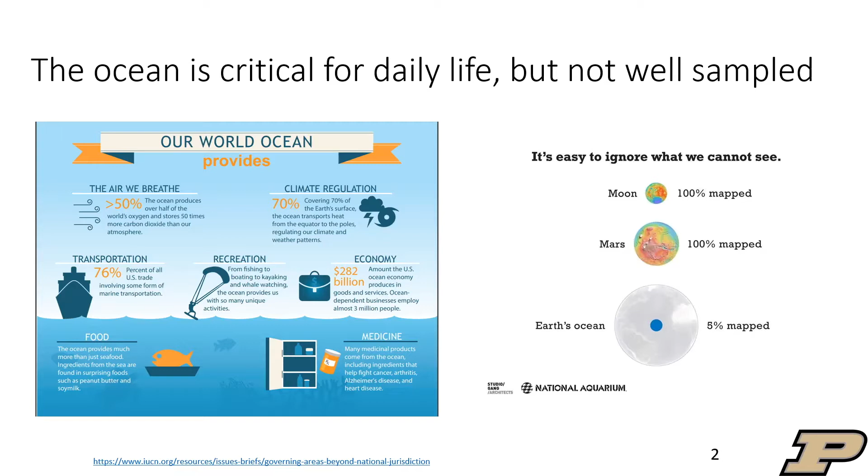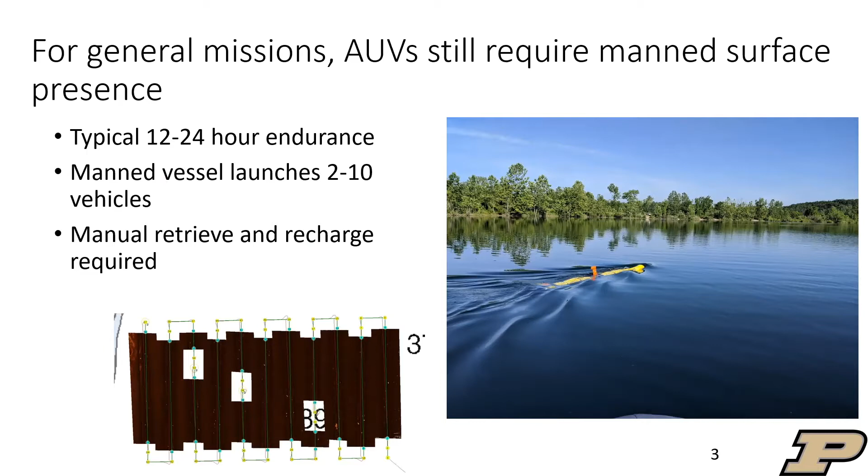Typical sensors have a range of a few hundred meters or a kilometer at maximum range, and basically it makes it so that we have to deploy a large number of vehicles to achieve any sort of goal. One way to do this is to utilize autonomous underwater vehicles with the support of manned surface vessels. Basically a manned surface vessel will go out in the ocean, deploy somewhere between 2 and 10 of these autonomous underwater vehicles. Those vehicles will operate for 12 to 24 hours doing a survey, and then be manually retrieved, recharged, and retasked. But still, you need to have that manned surface vessel, which costs in excess of $30,000 per day to actually operate. So any sort of large-scale operation is just basically infeasible.

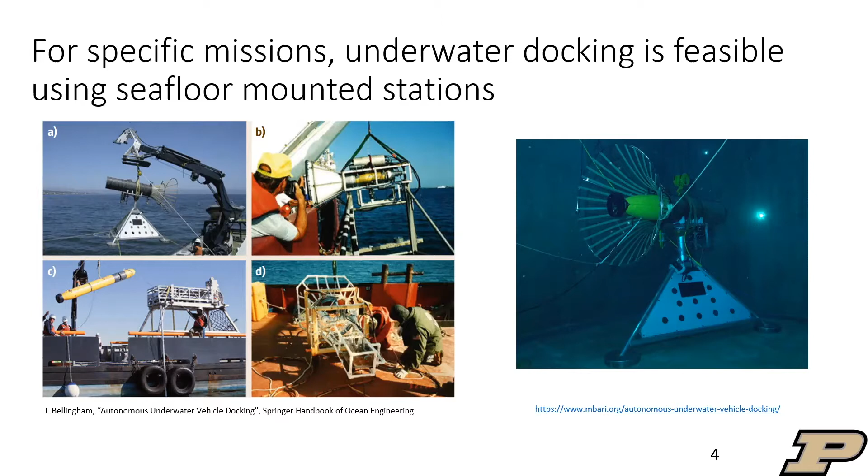For very specific missions, autonomous underwater docking is a feasible solution using current technology. These docking stations shown here are the most common type of docking station. It's basically a large funnel design, and with these docking stations, the vehicle comes in, bumps along, and is docked. Each of these stations is highly capable of supporting persistent operation, but they're each in excess of $1 million, are seafloor mounted, and only support a specific kind of vehicle. So that means that it would be equivalent to a gas station that doesn't support different makes and models of vehicles. Basically, it's an infeasible solution going forward.

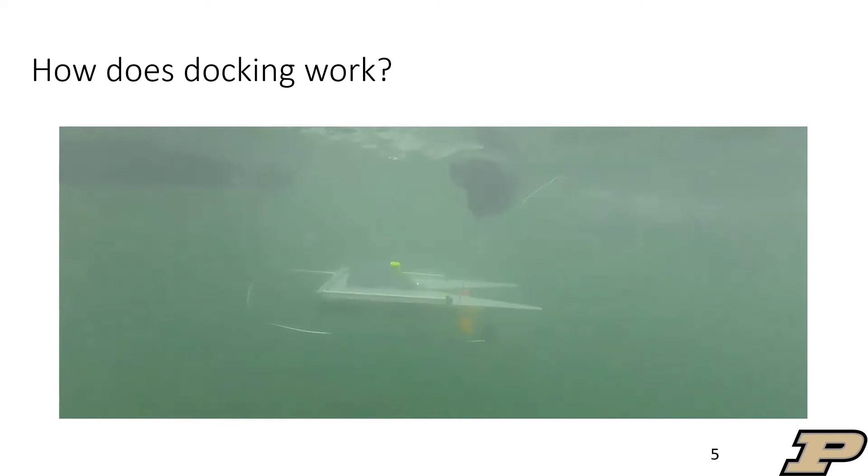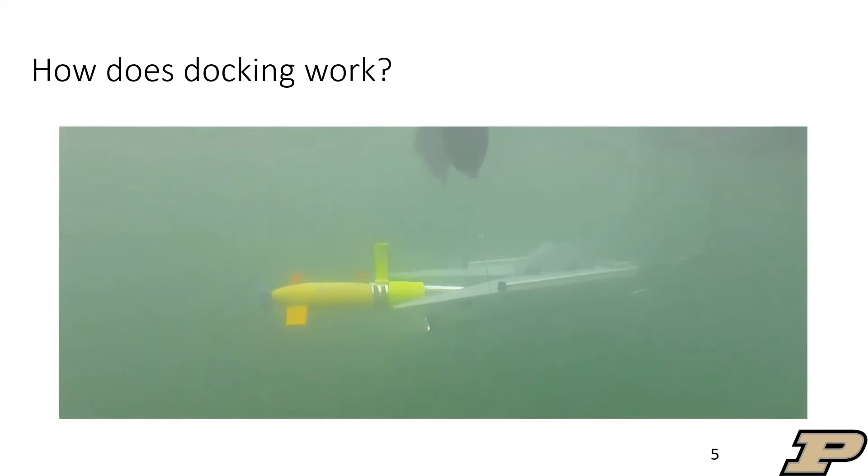And that led us to develop our own docking station, which is the Adaptable docking station. Basically, we realized that autonomous underwater vehicles are very good at controlling their depth, so we can simplify that design down, that 3D funnel design, into this more planar design, and then go in and dock to this docking station.

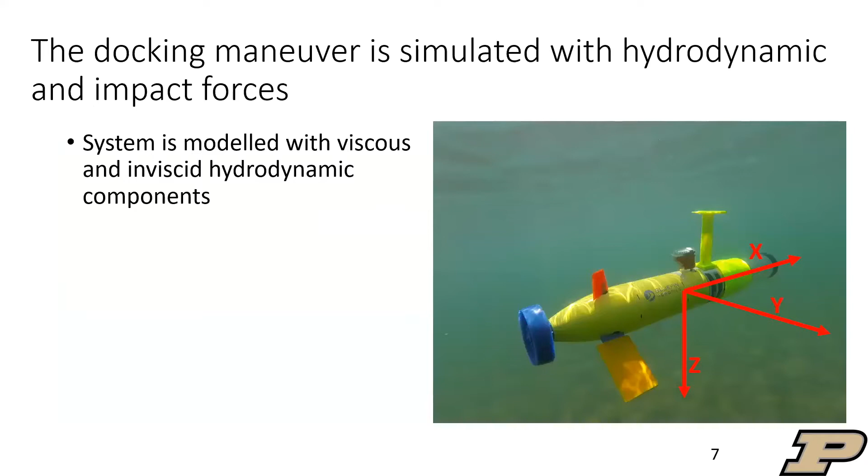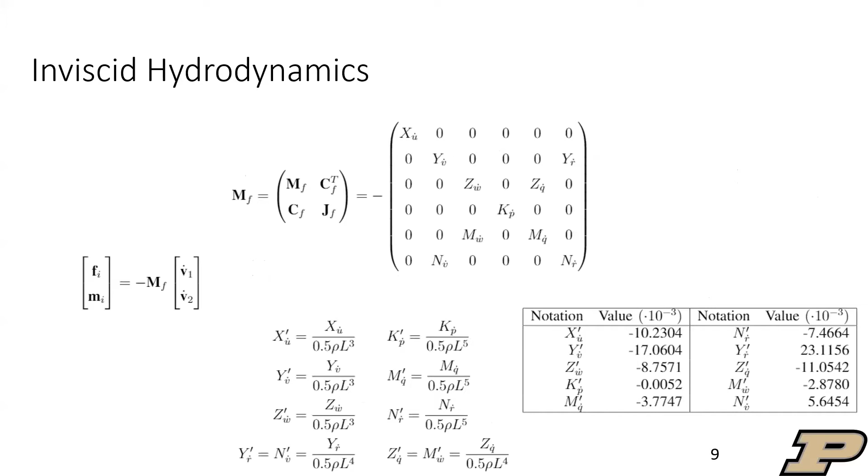But how did we actually get here? First, we had to model the system using hydrodynamic and impact forces. The hydrodynamic forces are modeled based on viscous hydrodynamics, which is basically terms based on velocities, angle of attack, that sort of thing, as well as the inviscid hydrodynamics, which are based on vehicle inertia, added mass, basically things that resist acceleration. Impact dynamics are modeled similarly using a third-party software.

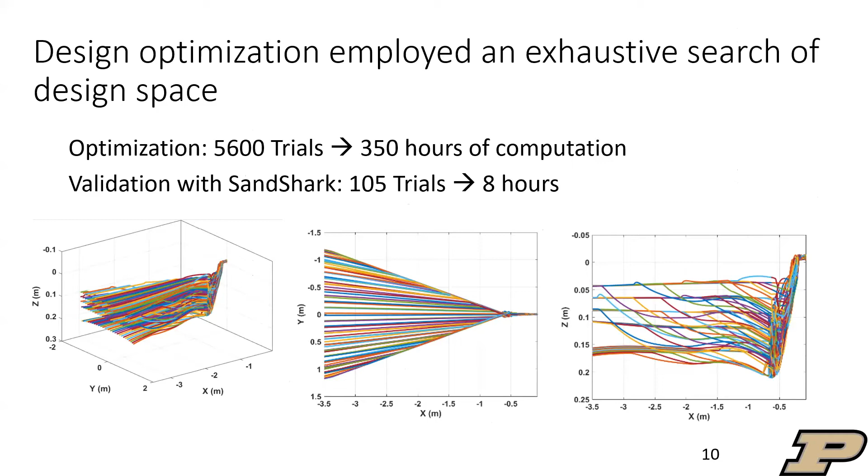Using these two terms, we can go and then do a design optimization to optimize the overall docking station design. That docking station design was optimized over several hundred hours of computation and validated with 2 different size platforms to basically lead to this result, where the vehicle comes in, bumps along the docking station, slides in, and is docked.

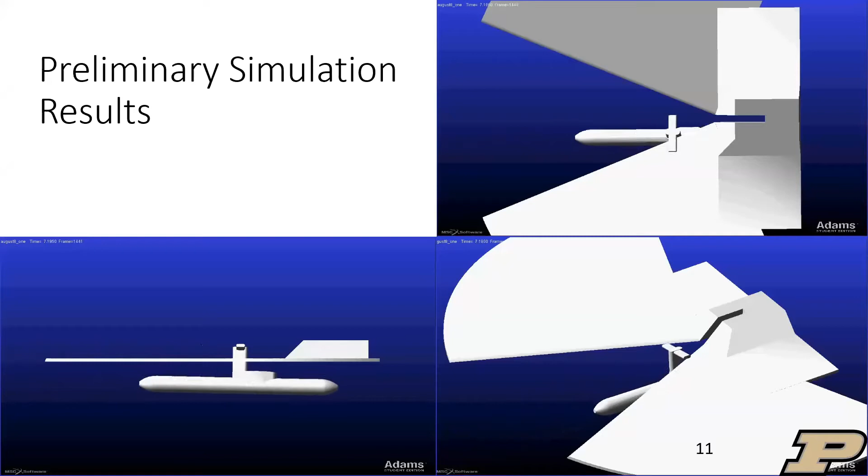As I said, we've validated it in simulation with a 10 kilogram size vehicle as well as an 80 kilogram size vehicle. These 2 vehicles represent the wide majority of actual autonomous underwater vehicles in the field.

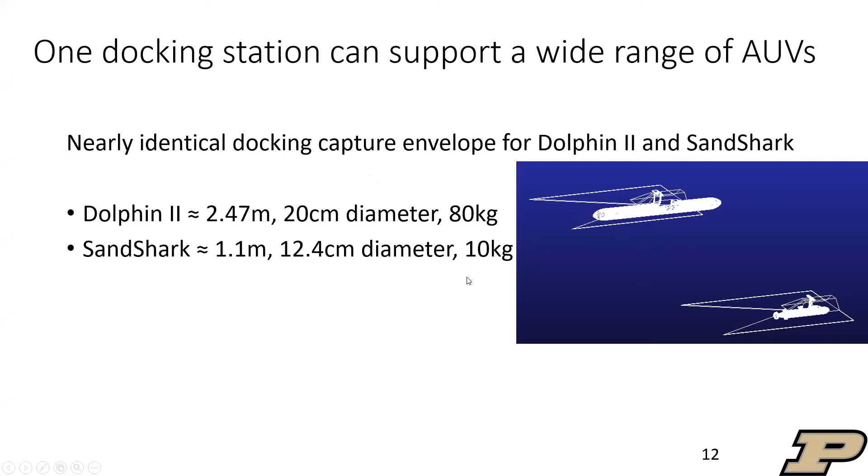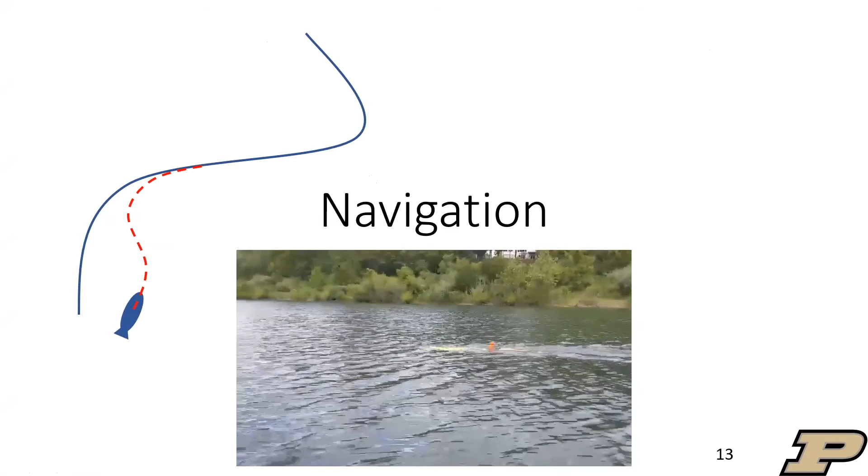So now that we know how the docking station is designed and modeled, we need to actually be able to implement it and navigate in the real world. Navigation in the real world for these vehicles is typically broken into 5 stages. There's the en route stage, which is basically the vehicle manufacturer controller doing basic scientific survey waypoint missions. At certain points through the mission, it will switch into what's referred to as backseat control, where we will take over with our custom controllers to approach or set up the approach and approach. By that, I mean that we will navigate from the field towards a point that is directly in front of and directly pointed at the docking station.

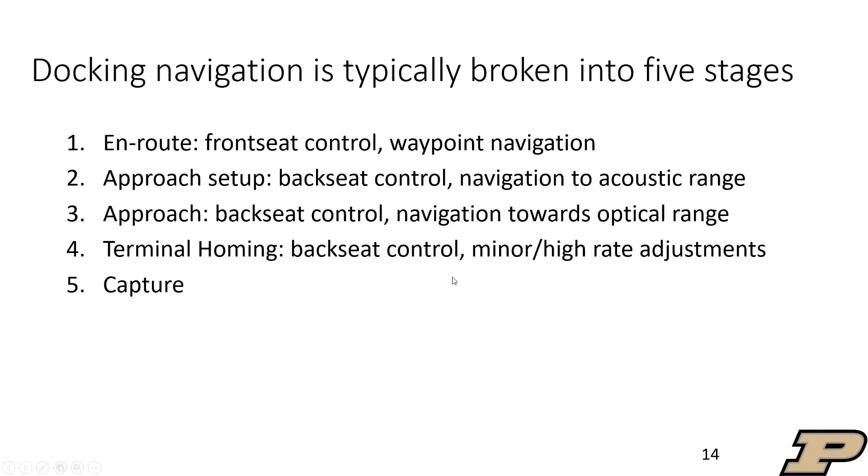At that point, it'll switch into terminal homing, which is based on optics for the minor high rate adjustments that are needed to increase our capture rate and lead to eventual docking. For our approach setup and approach phases, we're going to utilize a look ahead or line of sight controller, which is a very well understood common controller in maritime applications.

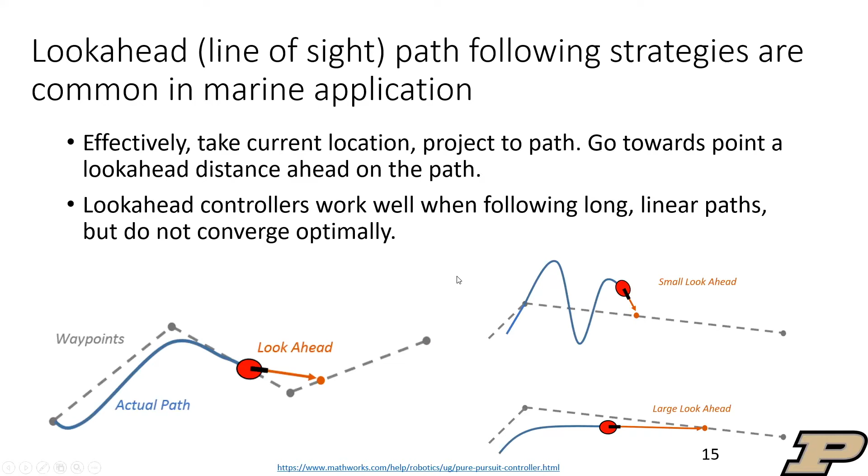One challenge of these controllers is that they have trouble with discontinuities, especially discontinuities in the location of the vehicle. Basically, they lead to instability of the controller. So we need to be able to handle those discontinuities, and we're going to do that by modifying the path that we're trying to return to, utilizing Dubin's set.

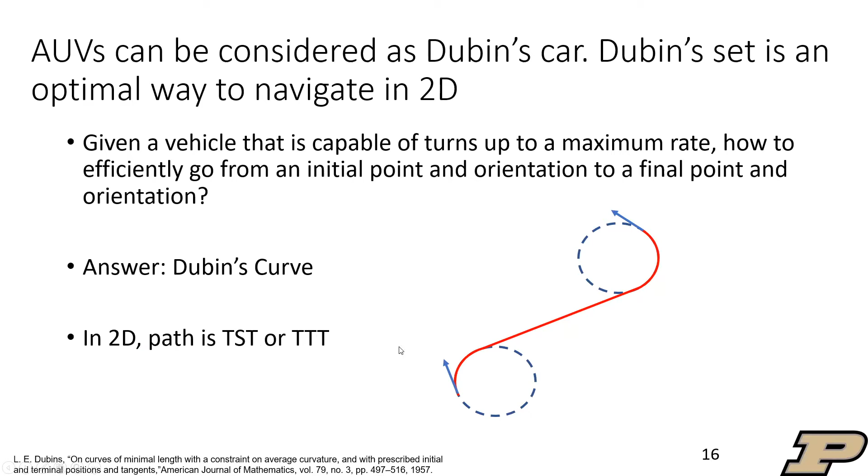In 2 dimensions, these autonomous underwater vehicles can be considered to be a Dubin's car, capable of turning up to a maximum rate. That means the solution to go from any point and orientation to any other point and orientation is always going to be this Dubin's curve, which is an easily calculable set of turn-straight-turns or turn-turn-turns to actually solve this path.

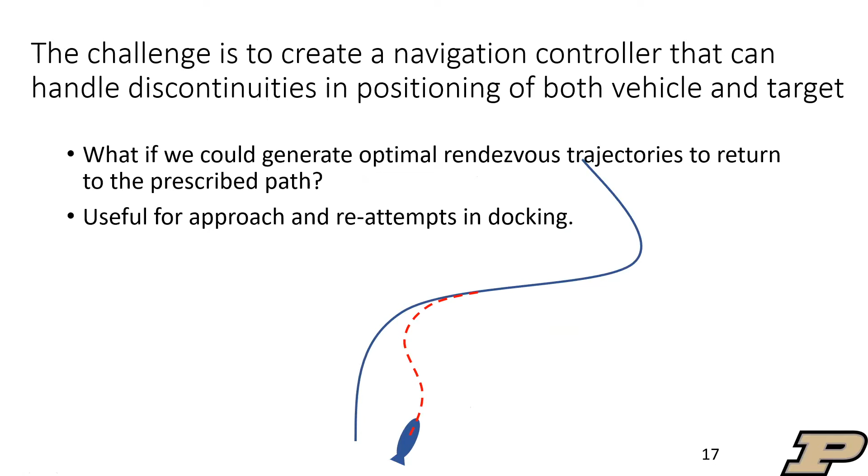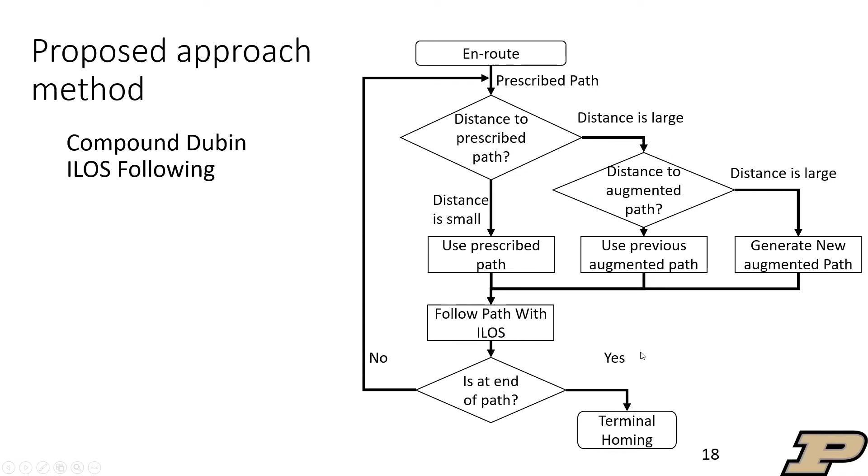Now that we know those 2 things, we can combine them into an overall navigation controller that can handle discontinuities for positioning of both the vehicle and the target, as well as handle reattempts on missed docking approaches. That leads to the overall approach method, where we switch into backseat control, measure our distance to the prescribed path. If that distance is large, then we measure our distance to the previously augmented path. Depending on the result, we generate a new augmented path, use the old path, or use the prescribed path, and then follow that path using integral line of sight until we reach the end of the path, at which point we switch into terminal homing.

For our terminal homing system, we're utilizing a very computationally efficient method. The reasoning for this is that autonomous underwater vehicles are very computationally constrained. Basically, they don't have power, they don't have the capability to do very intensive calculations. So we're doing optics based on a very simple brightest pixel approach. Find the brightest pixel, put it in the middle of the frame, use PID to control our rudder. Very simple, but very effective in the field and in changing water conditions.

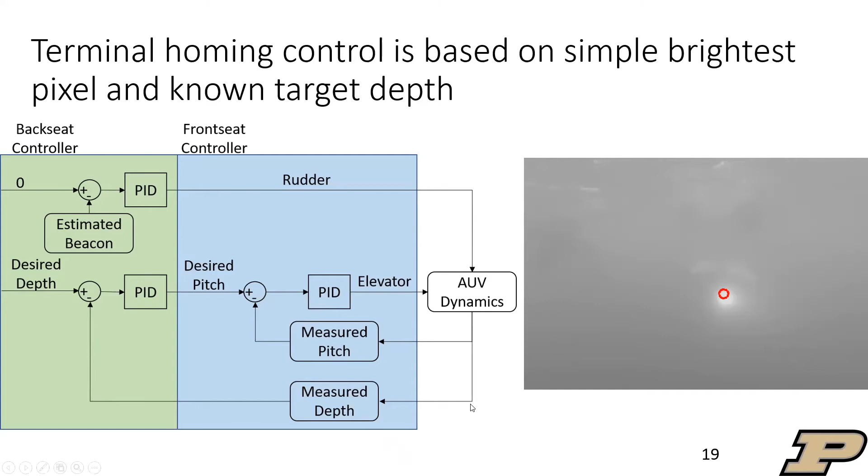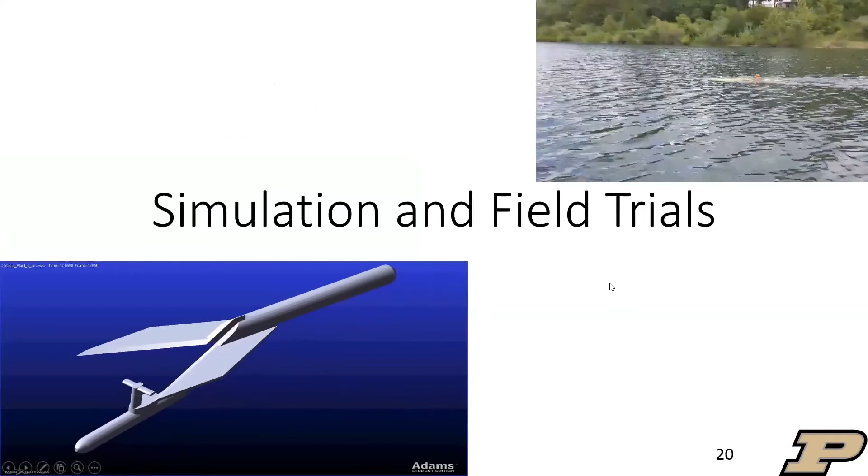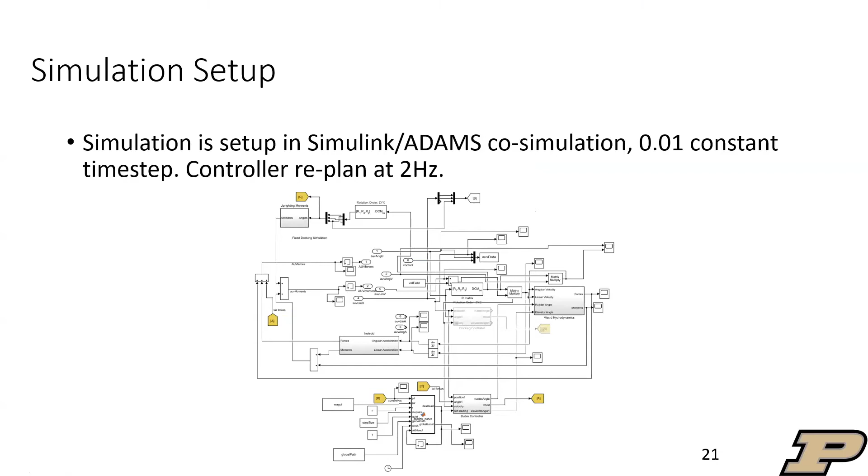Now that we know our approach, our control, and our actual design, we need to go and simulate and test in the field. This is where the bulk of the work has been, in the simulation and field results. For our simulation, it's set up at a 100 Hertz timescale, with the controller replanning at 2 Hertz. That's on the order of our controller frequency in the field trials.

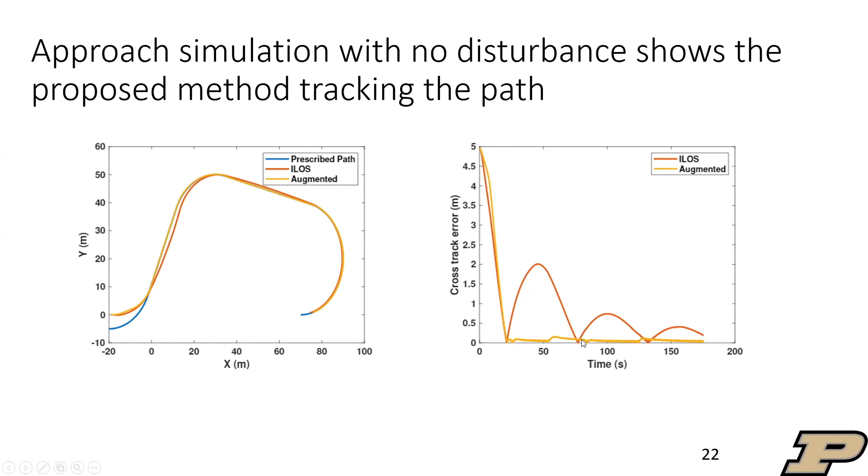These simulation results are going to be broken into 2 steps. The first step is this approach phase, where to validate the approach controller, I have it going around this blue path. The blue is the prescribed path that it's trying to follow, and then comparing the proposed method, which is this augmented method, with a more classical method, this integral line of sight method. The important thing is the chart on the right. You can see that both the proposed and the classical method converge at nominally the same rate. However, the proposed method is much better at rejecting these overshoots when there's no disturbance.

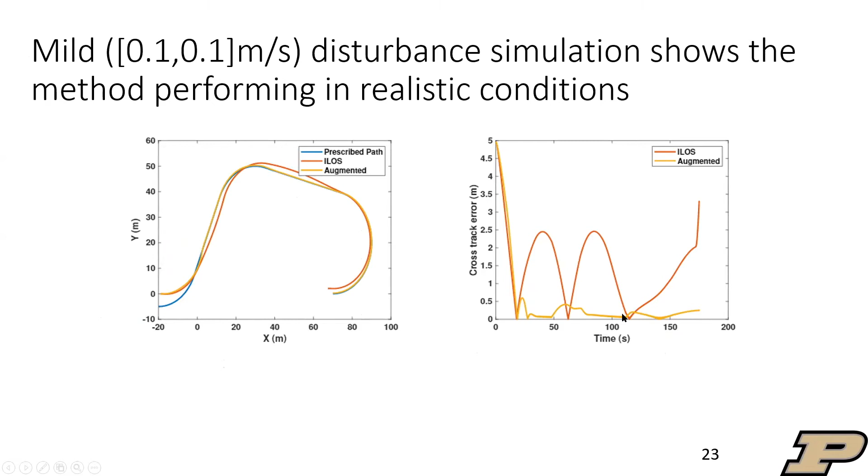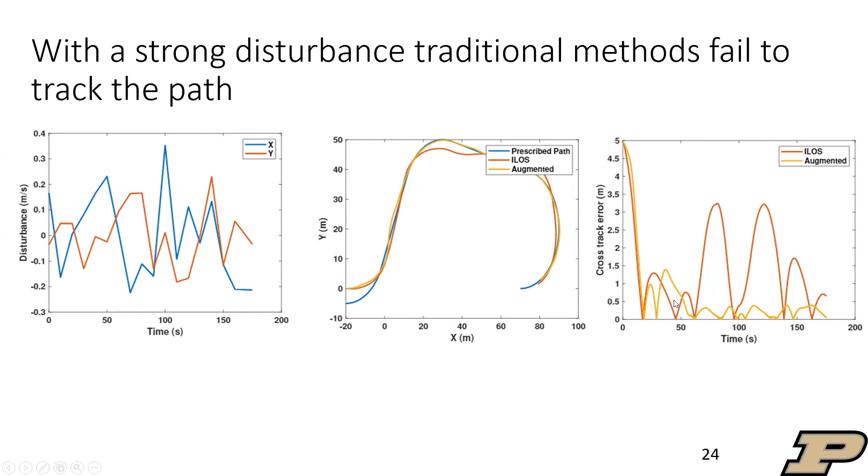When there is some disturbance introduced, a realistic disturbance of 0.1 meters per second in both directions, we have similar performance of the traditional method, where it has this overshoot pattern, while the proposed method is able to reject those disturbances. If we try to introduce a strong, not realistic disturbance, you can see that both controllers have more trouble with this disturbance. However, the proposed method is still able to maintain less than half a meter of cross-track error for the majority of operational time. The overall result is that the proposed method shows a 2 to 3 times improvement compared to the traditional method when considering the cross-track error over this trajectory.

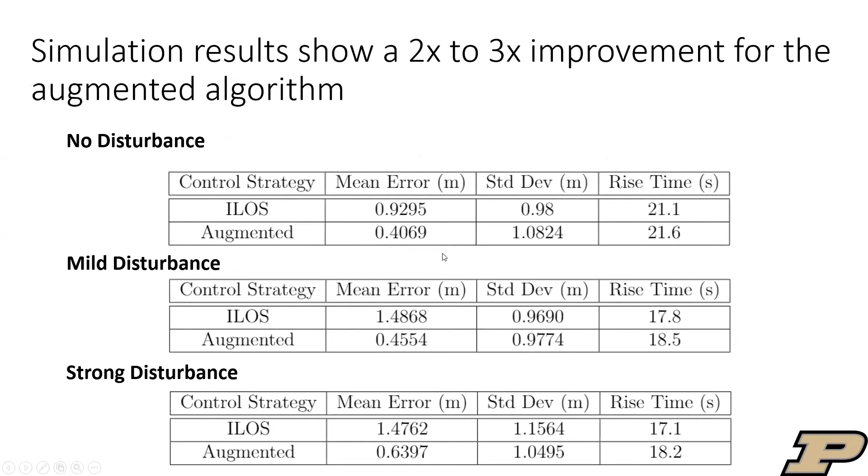That is important because it means we can always deliver the autonomous underwater vehicle to a handoff location for our terminal homing system. And for our terminal homing system, we're using this very simple approach. Here's the results in simulation.

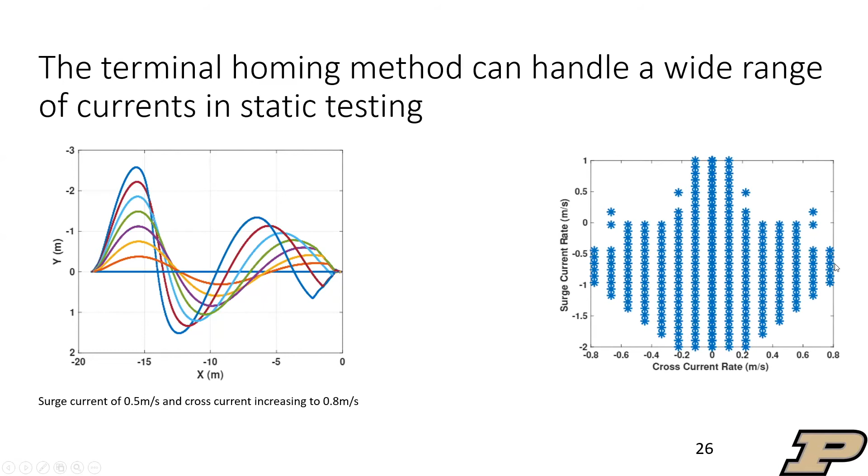That leads into our field results with this system. The field results I'm going to talk about in two stages: we have the approach phase and the terminal homing phase. They are disconnected at this point in the field, but are being worked on to integrate into one system currently.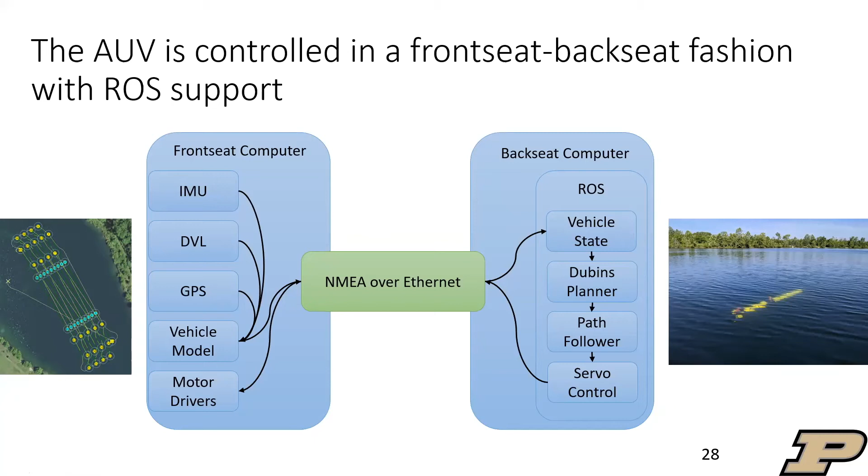With these two systems combined, we can achieve a wide range of things, such as extended autonomy testing, having it go around this pattern in the Fairfield Lakes Pond nearby. If we pull out a single trajectory, you can see we're submerged for the vast majority of the time, surfacing at relatively consistent intervals to get GPS localization. Over the trajectory, the majority of the time we're within 1 meter of cross-track error, which matches what was simulated.

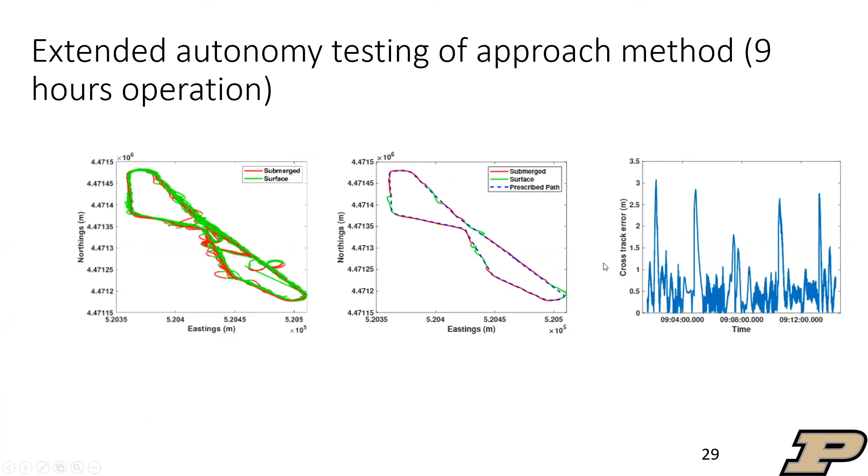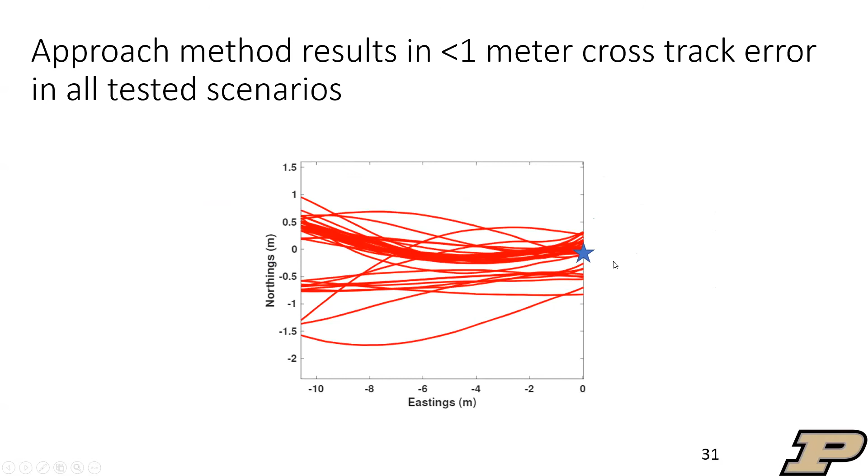If we consider the virtual handoff testing, basically how we approach this handoff point to switch into terminal homing, we can show that in every single tested scenario - this one went around the track 49 times - in all 49 scenarios it was less than 1 meter of cross-track error. That's significantly smaller than what was tested for our terminal homing system.

This implies that our overall experimental success, once these two systems are combined, will be very high, on the order of 70 to 80% success rate. But when you combine that with the reattempt ability of our planner, it will quickly drive the success rate to near 100% in the field.

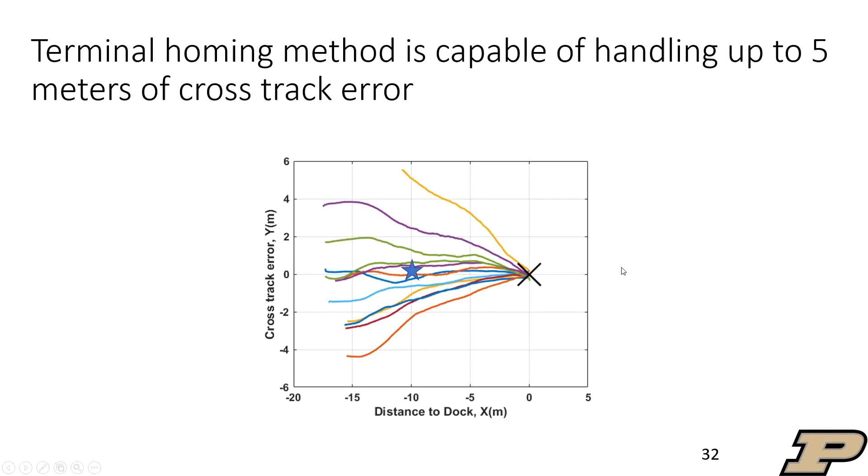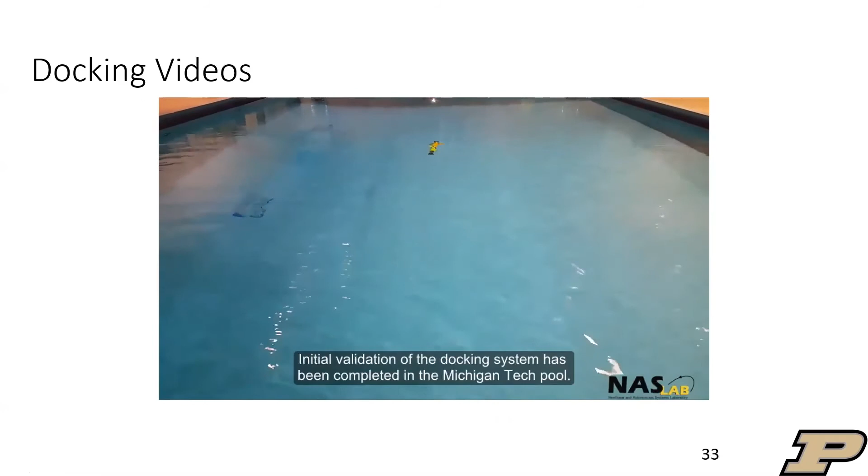That gets into the actual videos of our docking system. These are probably the best way to actually explain how everything works. You can see the vehicle is coming in here. In this case, we released it from relatively straight in front of the docking station.

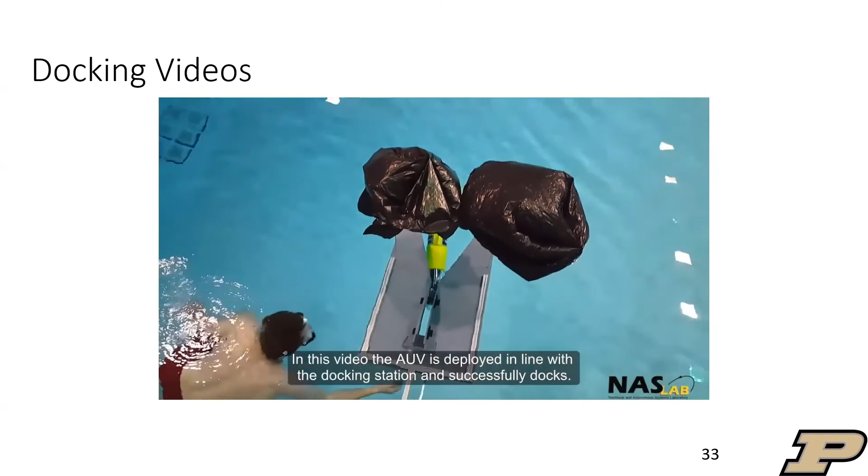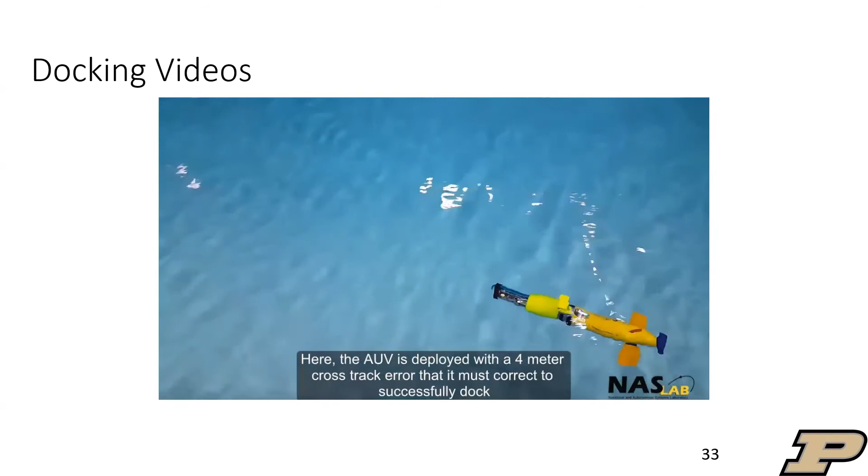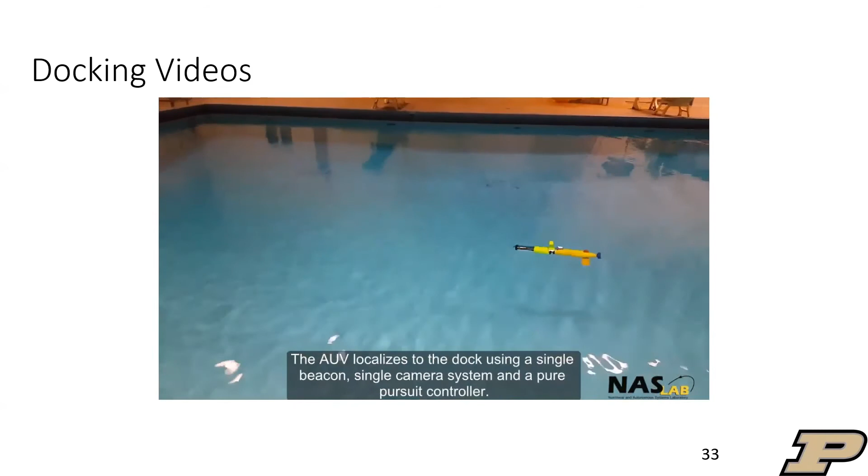So you can see it comes in, slides, and is docked. Once it's in the docking station, we're working on integrating the power electronics to actually recharge. But for now, it's just getting into the docking station. In this one, we're releasing with a 4 meter cross-track error, and the very simple single brightest pixel approach is quickly able to correct for that 4 meter cross-track error and navigate the vehicle into the docking station from across the pool and successfully dock.

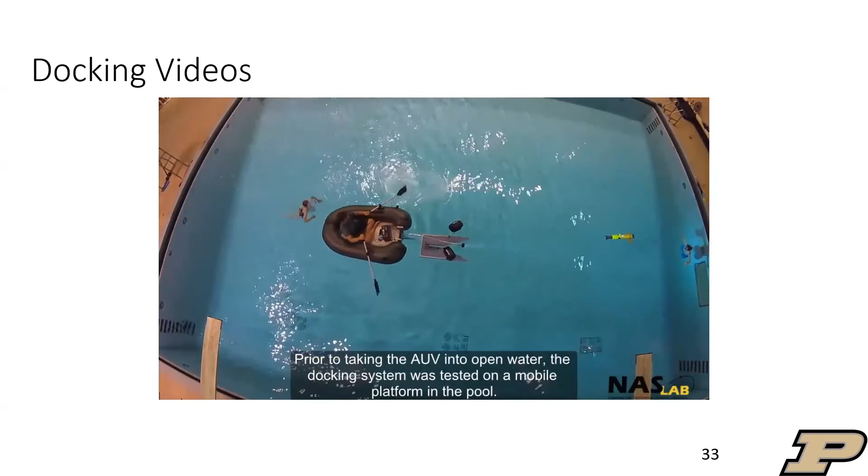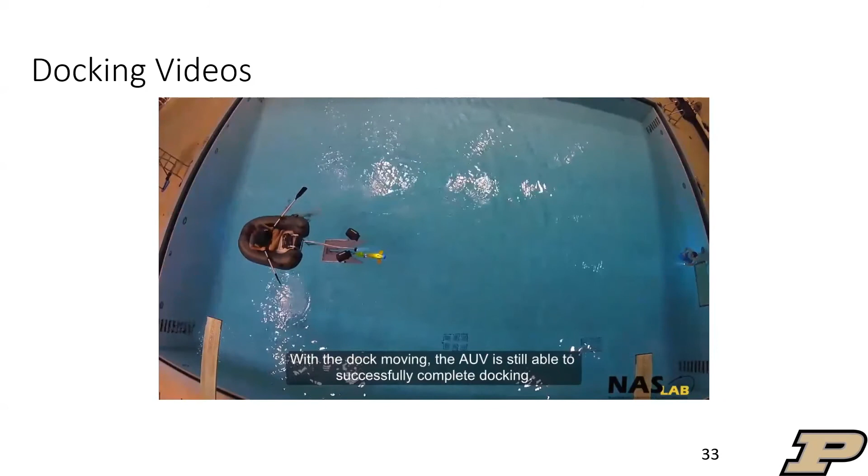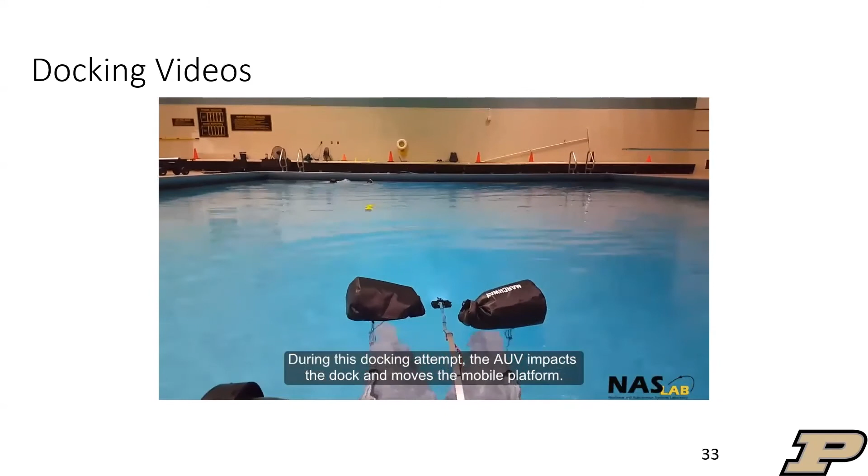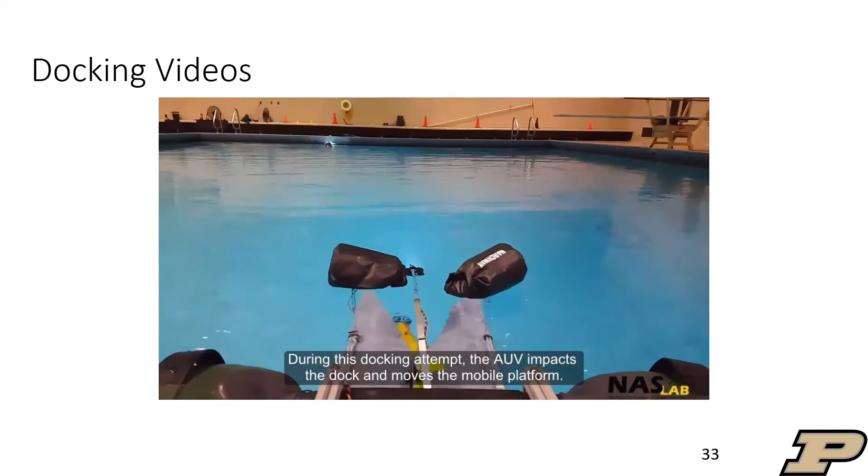We also tested docking to a small inflatable boat rowing around in the pool sort of randomly, and again the very simple approach is capable of navigating towards the docking station with good success rate. In all of our pool testing, we had about a 70 to 80% success rate. In open water, it was nominally similar as long as we released it within vision range. Here you can see the vehicle come in a little bit sideways, but due to the flexibility of how everything is designed and simulated, it causes everything to rotate and eventually successfully docks.

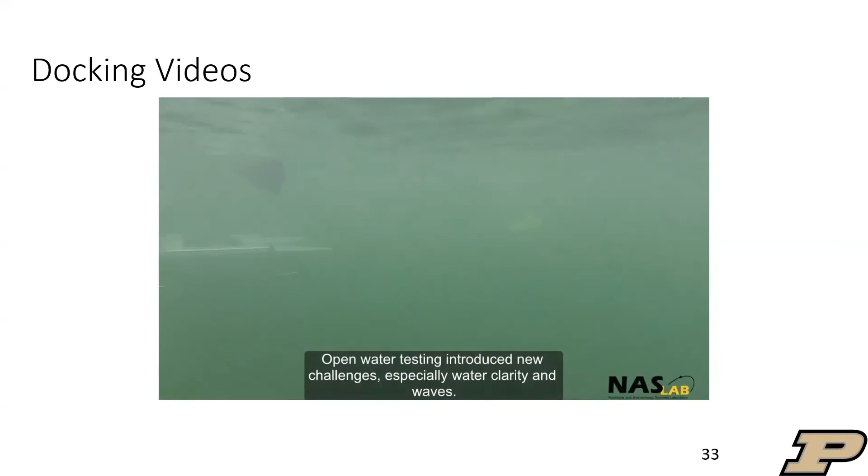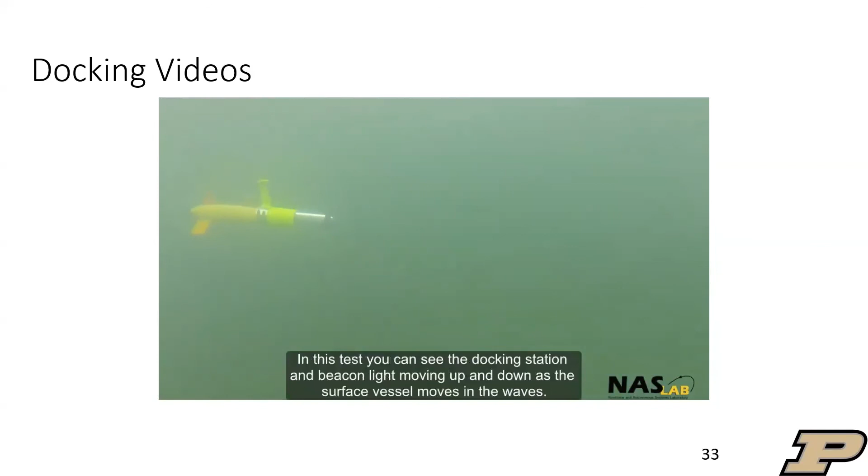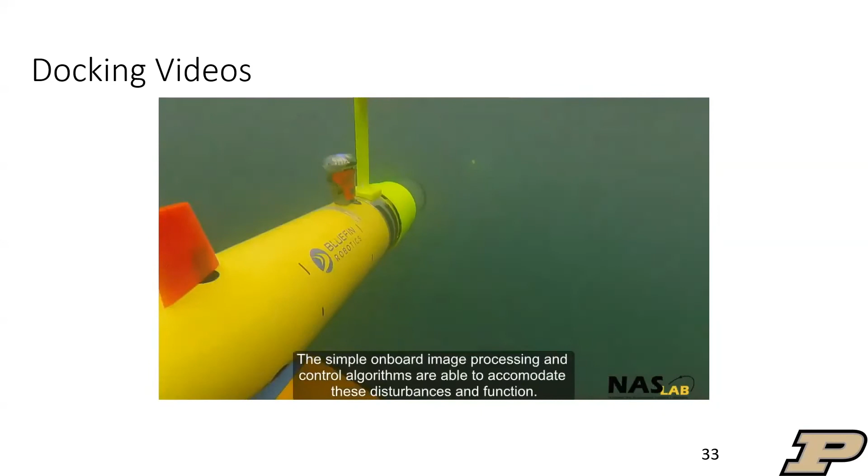As we transitioned to open water, this is in Lake Superior. You can see the vehicle comes in and is able to reject any sort of disturbance from the wave state, as well as disturbance from the boat actually moving in the wave state, to successfully navigate in and dock. Everything is moving up and down in the wave state, and it doesn't really matter for the overall docking efficacy. Here it's coming in from relatively far field - you can see the docking station from about 10 meters away in this water clarity, and then come in and successfully dock.

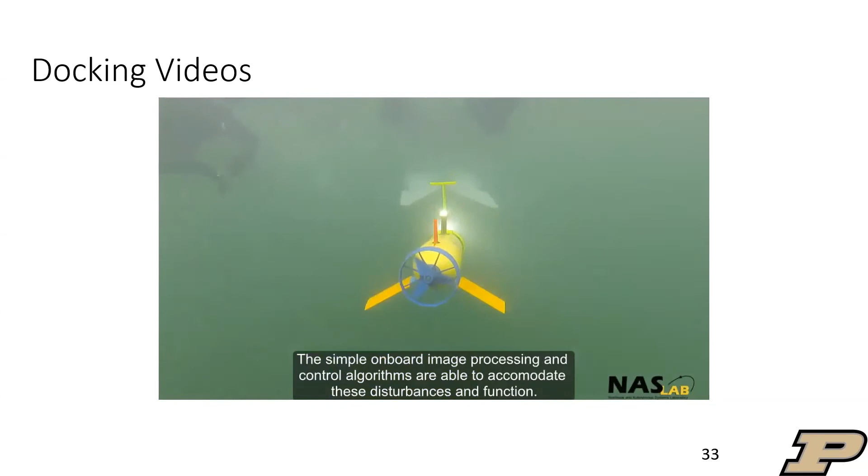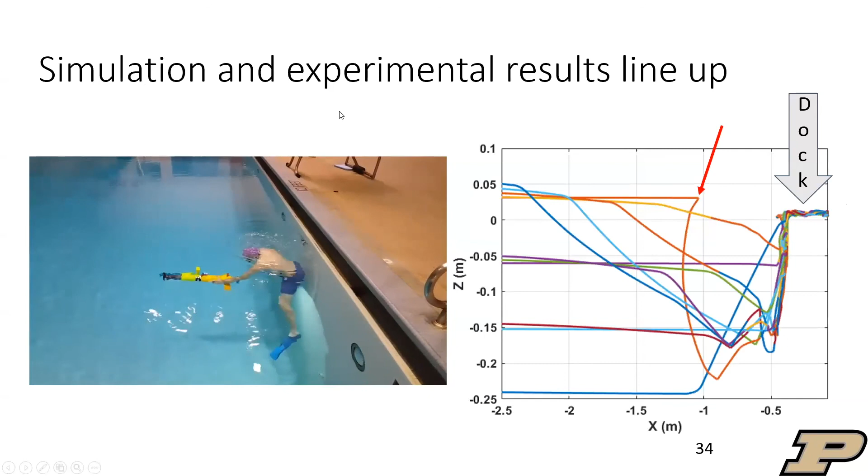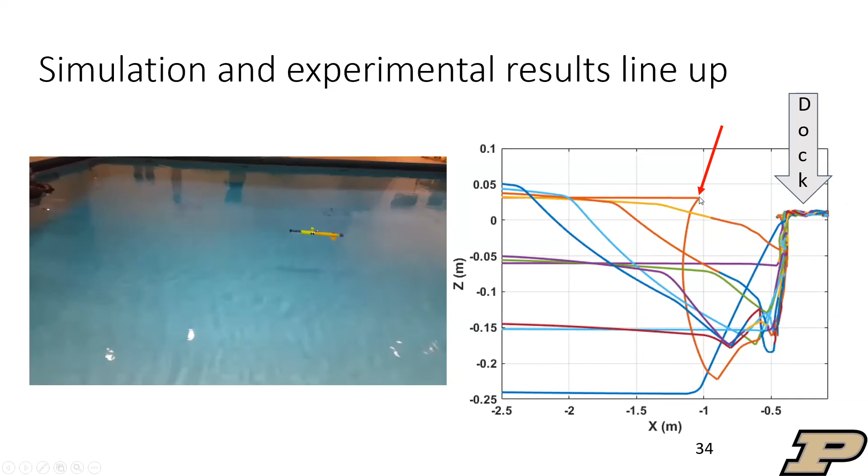Overall, we also had one result that was particularly interesting. You can see the vehicle is coming in from across the pool. It's going to come in a little bit high - we were still tuning our depth controller at this point - but it's coming a little high. It's going to bounce, pitch down, go down, and then come back up into the docking station. Basically this and all of our other results have indicated that the simulation and experimental results line up with very good accuracy, which is a reassuring sign.

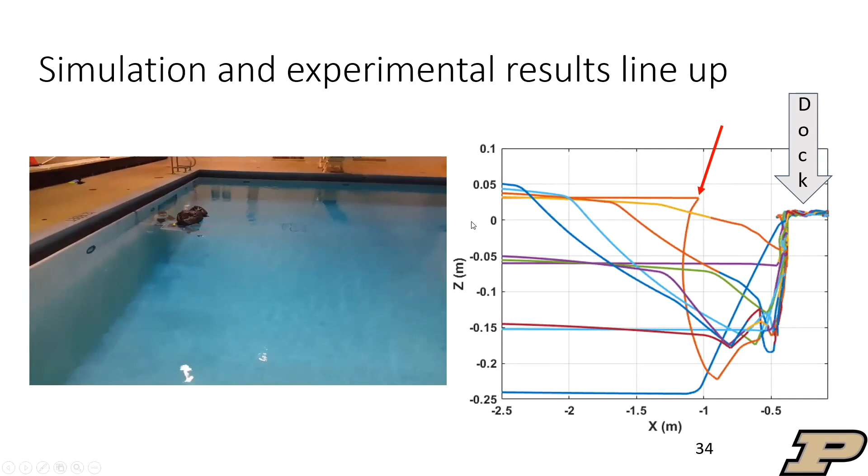So that gets into the overall contribution. Basically the biggest contribution is that this underwater docking system can enable a new concept in AUV operations. It's been designed and validated with a very simple control strategy and is capable of supporting a wide range of vehicles. We simulated with a 10 and an 80 kilogram vehicle, which represents the majority of vehicles in the market. The tested control strategies for both approach and terminal homing are robust to changing scenarios and changing conditions.

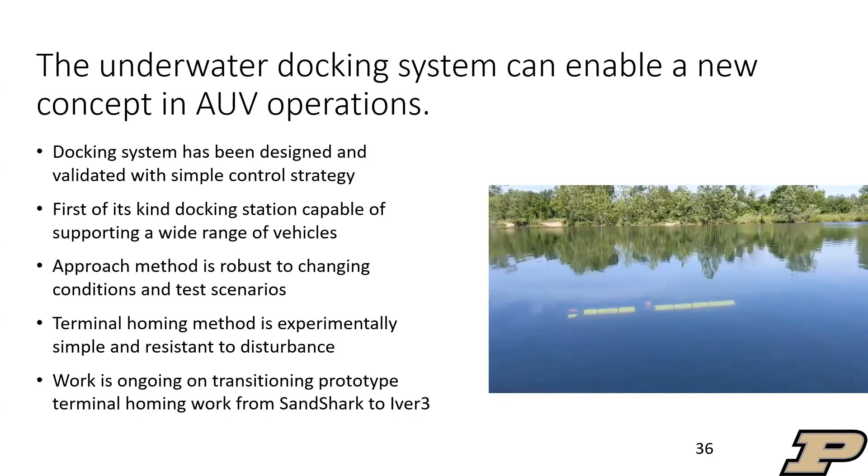Work is currently ongoing on transitioning some of the work from the small vehicle to this larger vehicle shown in the video here. And that has been my work on persistent autonomous maritime operation with an underwater docking station.